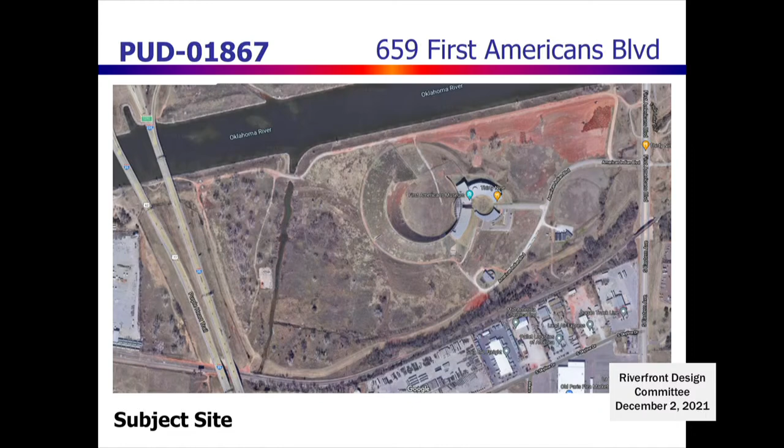So just quickly to go through our actual PowerPoint, as we always do, you can see here where the site is located, and we've kind of grayed out the First Americans PUD that was done separately. Another aerial view of the site, and kind of some surrounding views from the surrounding streets as you're approaching First Americans. And I will confess that we copied these slides over from a previous presentation about First Americans, so you're seeing the same things that you've seen several times before in these meetings.

So I'm going to pull up the applicant's presentation. If you all would like to approach, and if the committee has any additional questions for staff or for the applicant. Thank you, Katie. Are you going to be operating slide change? Yeah, if you don't mind, just because we have, okay. Yep, just let me know.

Thank you. Tim Johnson and Mark Zitzow here. We are with Johnson & Associates, 1 East Sheridan, Suite 200, Oklahoma City, and we are here on behalf of the applicant for this project. Just a couple of introduction remarks that I'd like to make, and then Mark's going to go through the heart of the presentation. First of all, I'm going to apologize for the length of this presentation because there's a lot of material we want to provide, and we think it's very important because we've been working on this for 2 years.

It only went public back in summer, July, and actually before it went public, we had conversations with City Council and the Mayor's Office and the City Manager advising the city that this was coming forward. And I was present in all those meetings.

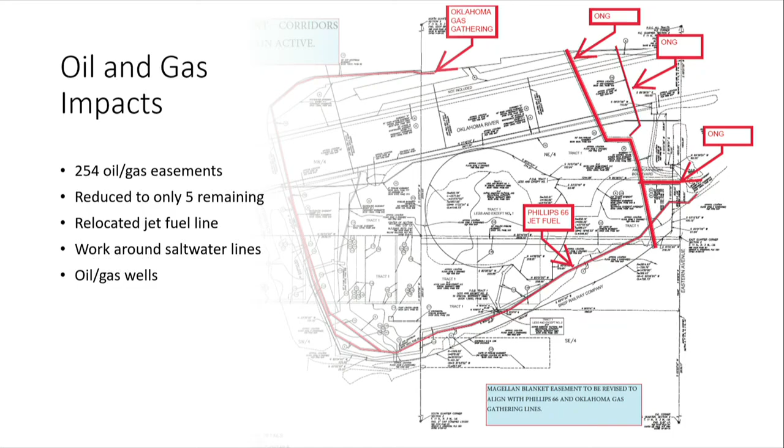We've exposed and excavated. ONG has been a great partner in this project because we are not only butting up against their easement, we're bridging their easement twice. And they have approved all of that. Next slide.

So on the site, you can see that the shaded, the grayed area is the existing museum facility. It's served by a lift station, the little square box on the bottom, it says not included in the PUD. That's the housing for the lift station that serves them only, and it was only designed for the museum.

The east half of this site and most of the west half of this site is in the 100-year floodplain. So we'll be bringing in a ton of dirt to raise this site well above the 100-year, in some areas 10 feet above the 100-year. And a lot of that has to do with the fact that the museum itself is on a pedestal, it's 12 feet above the 100-year, and so we'll be relocating the existing drive that serves it today.

We'll be bringing a new street, Mark will show this in a little more detail, around to the south, and then feeding the FAM, or the museum, through a separate public street. We've met with Embark about public transit, which was a very important aspect of Councilwoman Nice's concern about this. Her concern was getting workforce people to get to the site. At the end of the day, there'll be 400 workforce employees serving this.

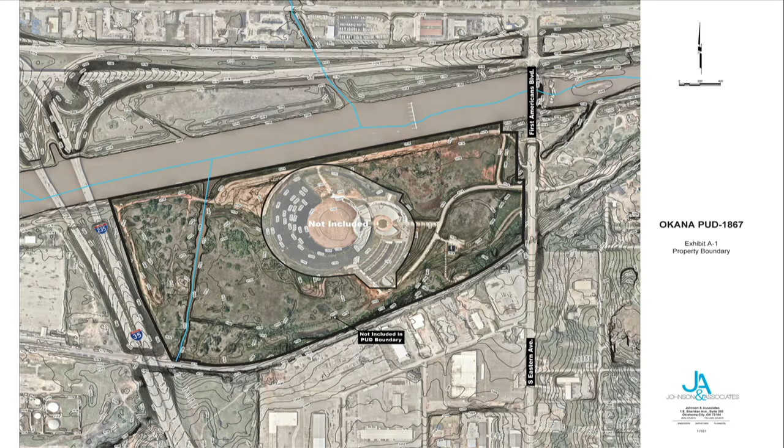Next slide. And then I wanted to point out that the First American Museum, as well as the leadership of the Chickasaws that we have been working with and the development team, they've been in communication. They're not going to be left behind. They've been involved every step of this process. And then next slide. So with this, I'm going to let Mark go into the design of the PUD.

Good afternoon. My name is Mark Zitzow with Johnson & Associates, 1 East Sheridan Avenue. Two quick points that were on our previous slide. We've also been working in partnership with the Parks Department and the MAPS Department in regard to the trail that will be placed along the river and new bike lanes that will go over the bridge and where that trail will cross over. So I think to Tim's point, we have been working with all departments, including planning and development services, on this PUD for an extensive period of time.

And as Tim was alluding to, this was not a way or an intent to cut the city out. This has mostly to do with the timing of the process of Scenic River. And so I'm going to walk through the project and then we'll touch base on that again. So Tim mentioned this site has been under design for the last 2 years, and we've been involved with most of that. The major focal point of this project is the First Americans Museum.

So this has been purposefully designed in conjunction with that museum to enhance it and note its prominence on the site. There's been respect paid to the equinox and summer solstice, which was part of the original master plan for the project. So there are pieces of that that have been carried through onto this plan. We are activating the riverfront with new trails, connections, and entry points from our buildings. I think you'll see this in the renderings.

We're not viewing any side of this building as a rear. There is no backside. Everything has treatment that's opening out to the river and internal. By its nature, it is somewhat of an insular property similar to the Boathouse District. It is essentially a resort that will be inward facing, but in no way does that mean that the river is not getting the treatment that's deserved for a project of this caliber.

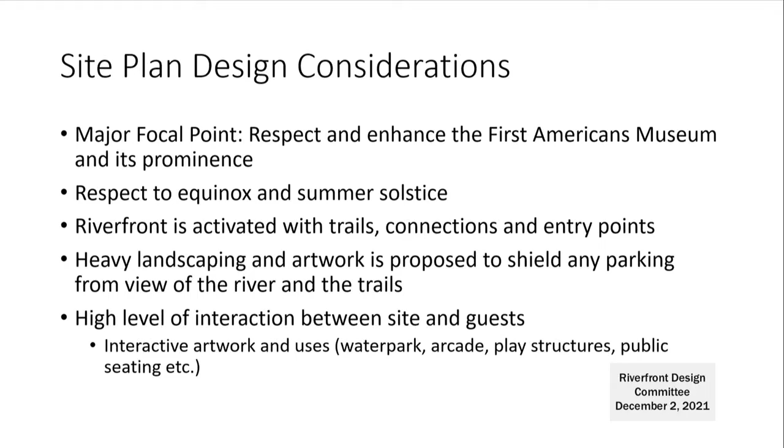And you'll see that through the heavy landscaping and artwork, both murals and interactive artwork that's going to be placed throughout the property. Ultimately, the goal here is a high level of interaction between the site, the river, and its guests. And again, we'll note that through some of the uses and the activation that's occurring on the site. Go to the next slide, please. Thank you. So I'll quickly walk through the site plan.

From a high-level standpoint, there are 2 pieces of this property that are not included in this PUD. Katie mentioned the First Americans Museum and its associated property in the middle. And then Tim mentioned the lift station on the south side that is not included in our PUD. So there's a small little piece in kind of the center south that is excluded.

You can go back. On the right, you'll see a color that's a little bit brighter than the rest. That is our phase 1 and our phase 2. That is everything you'll be seeing today. Within the PUD, there is a special requirement for what's called the future phase to come back for a specific site plan approval through the Planning Commission, given that that piece is a very highly conceptual design right now. Everything that we've been working on to this point is everything on the east side of the museum.

So I will start kind of clockwise. I don't have access to the mouse, do I?

No, sorry. So if you hover over the white building on the right, just south, yes, that's the water park. It's an indoor water park with slides that will exit the building and bring you back in. I'm going to kind of move clockwise. There is what will be a surface parking lot that's likely a temporary use that will be redeveloped down the road. There's the new street that is coming in off of Eastern that is going to loop around what's the backside of the development, bringing you

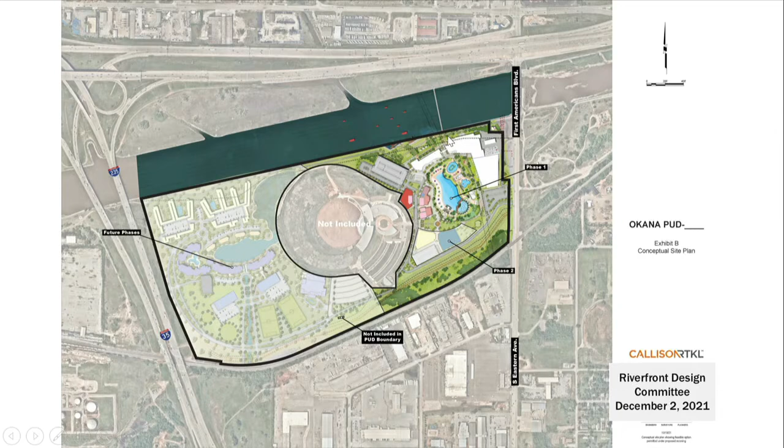You can see the trail along the north side of our property. We have worked with MAPS specifically to ask that that trail be put on a slight hold and worked and incorporated into the design. A grant was received to add a Devon River Cruise drop-off. You can see that cutout on the river. So a grant's been received for that. And in working with MAPS, the trail will kind of be a switchback for a grade difference to work back into the trail. That trail will head east, back toward First Americans Boulevard, and the connection through First Americans Boulevard is being moved to a safer location to the north slightly for access.

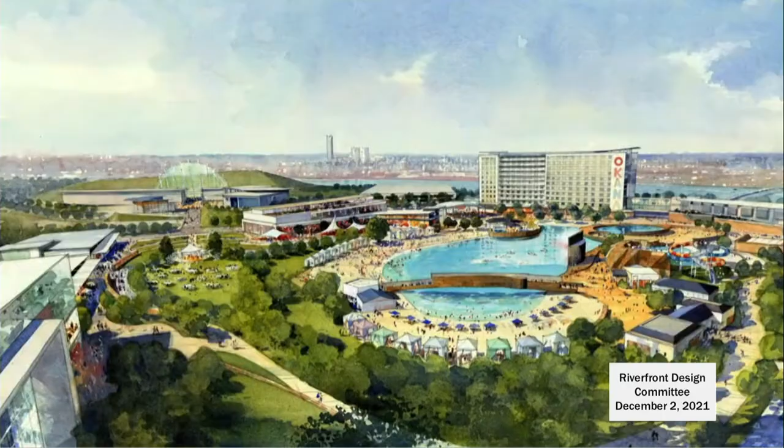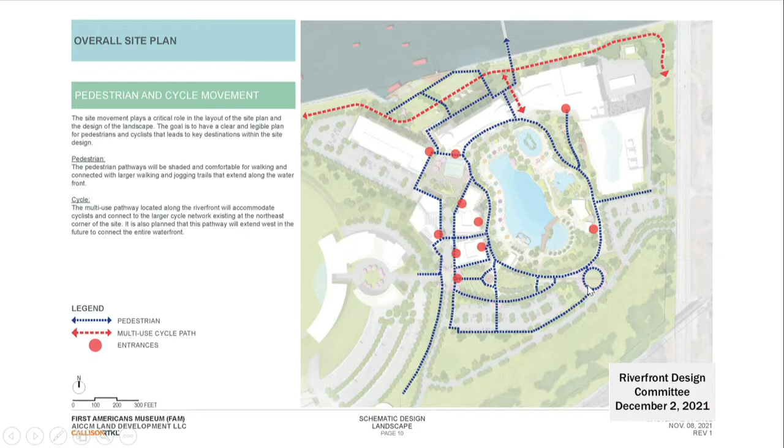Next slide. Thank you. So this is a rendering looking back toward downtown. You can see the First Americans Museum on the left side, and on the right side, the OKANA Hotel. This is essentially looking from the water park, and so you could see the lagoon feature. It's a beach-style entry pool. And then on the left would be kind of those Phase 2 buildings. There's a plaza / amphitheater on the left-hand side that's leading you into the museum.

And you can see the goal, and this is a rendering, but we're confident in what we're showing because of how far along we are in plans. There's a significant amount of landscaping that's going to be placed on this project. If you can go to the next slide.

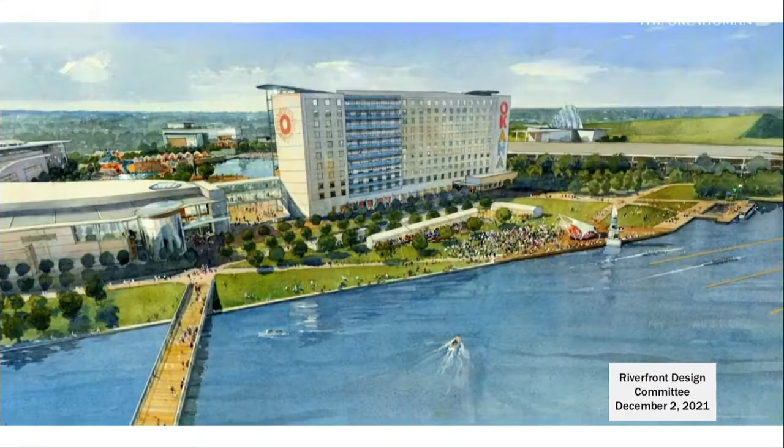This is looking south from the river. You can see the Devon River Cruise drop-off on the right side, and then there's another plaza by what's the starting line tower for the boat races and kayaks and canoes. So there's a large open green space, connections back to the trail, and you can see, just in looking at these renderings, that the OKANA Hotel is going to have openings and access points, and then those large pedestrian connections.

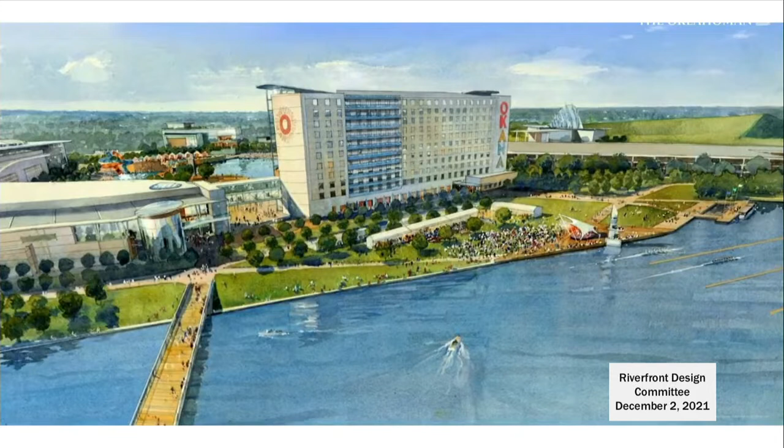The one piece I will note on this, the bridge that is shown is a funded bridge for the city. The location is yet to be determined. So because it's crossing the river and extending outside of the PUD, that will likely come back to you. It's undetermined as to what part of the river that bridge will actually be on, so you will see that bridge in the future.

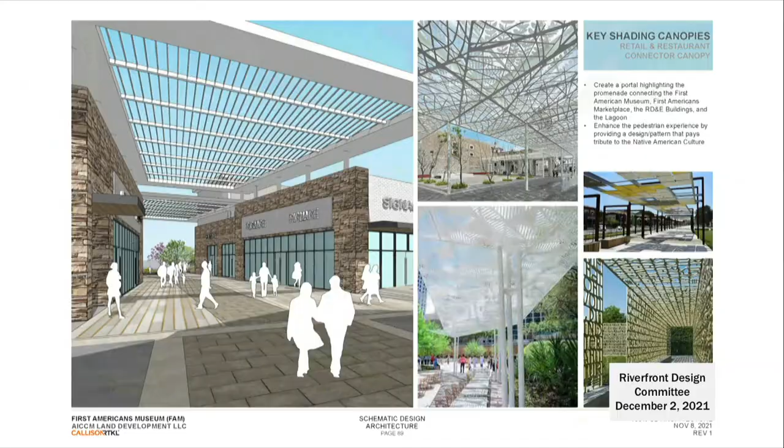Next slide. So in your packet, you had some 35 images and renderings. That's probably maybe an eighth of the amount of renderings and elevations that are out there. So I've just grabbed a few that I want to run through that show kind of the high-level design and architectural materials that are being used. Oklahoma is hot. I don't think that surprises anybody. So a portion of this project is being designed with more interesting and artistic canopies to shade some of these walkways and these plaza areas. If you can go to the next slide.

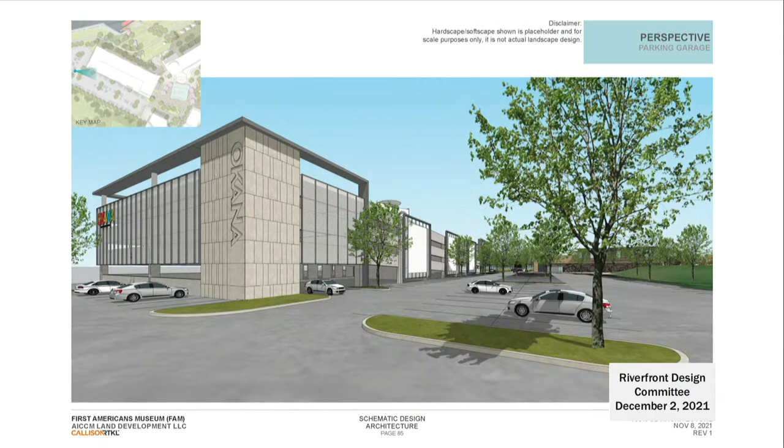Here's a picture of the parking garage. So this is the side of the parking garage with the surface parking lot that is facing away from the river. And you can see on this one there are berms on the right side that screen it back to the museum. But if you look at the parking garage, there is going to be architectural screening, but then there are large blank canvases that are going to feature native artists. And this is just on the parking garage.

You'll find that on almost all of the buildings as we kind of move through this, but it will be heavily landscaped. And on the top left, you can kind of see the angle in which we're showing you. This would be on the side away from the river. On the side facing the river, there's much more landscaping to shield the parking garage further. You can go to the next slide.

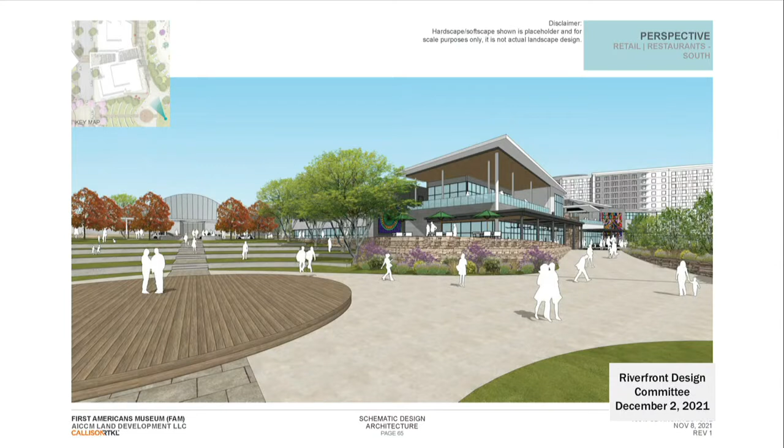Here's a plaza that's looking back toward the First Americans Museum. I think this shows that this project is still being built solely around that focal point and tying back in. And then you start to see the use of a lot of stone and earth materials that have been used and are represented in the First Americans Museum. Next slide.

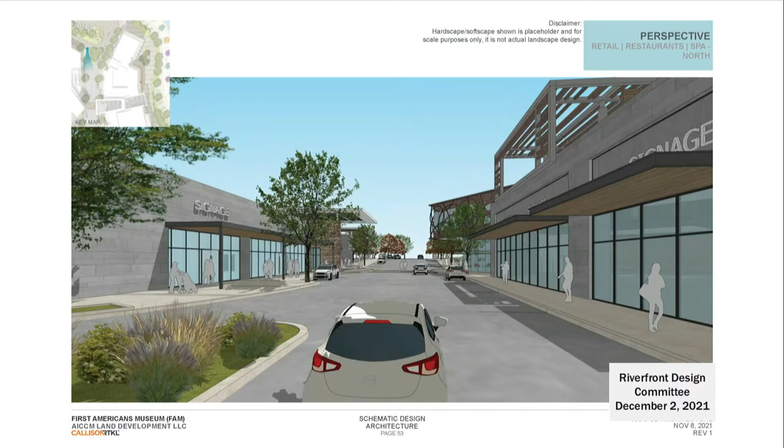Here's a section of the street that's being proposed. You could see the retail is fronting. The signage in this area is minimal. There are sidewalks and landscaping and tree wells that will be placed throughout the project. Next slide. Here's another view.

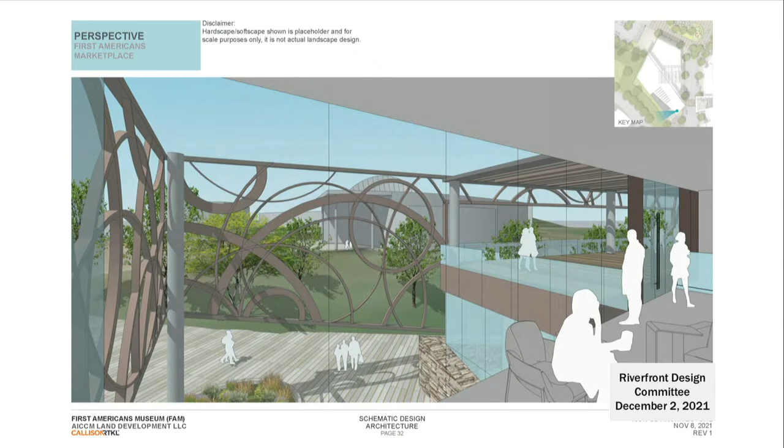We're looking at material changes within the street and in the plazas to note pedestrian areas versus the vehicular areas. And again, you can see that use of stone and natural materials throughout the project. And again, the awnings that are providing some shade to provide comfort through all seasons. Go to the next slide. This is a second-story view looking back at the museum. So again, all of the buildings are trying to provide a perspective looking back toward the museum. Next slide.

This would be the spa, golf simulator, and retail buildings. Again, there are large pieces of artwork that will be placed on the sides of these buildings, highlighting native artists.

I'll close with the images and renderings of the sign package represented in this PUD. As you can imagine, there's not a lot of high visibility from this site, so we think signage is important. We're proposing two project identification signs located at Eastern Avenue, similar to the variances you've approved for the museum.

But then there's a series of other signs located throughout the district. This project is unique in that this whole tract is being developed by one entity. The reason that's different is if you think about Bricktown or downtown, you're dealing with signs on a particular building, on a particular site, and how they're all interacting together. This is a project cohesively designing all of the signage, knowing what its needs are, which are higher and different from that of a design district.

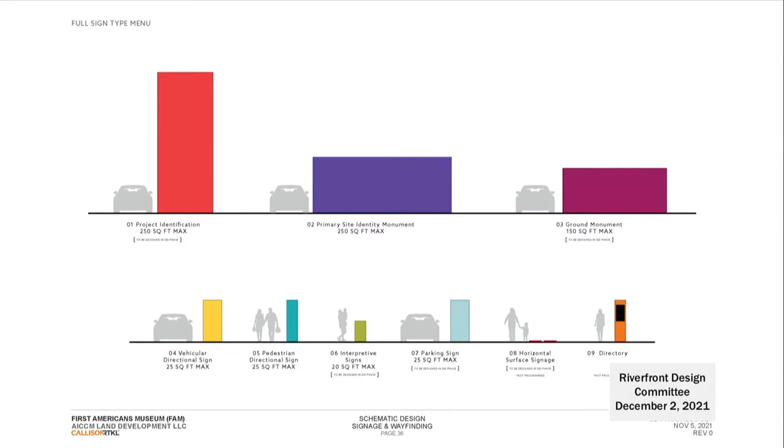So Tim mentioned Scenic River being adopted in 2007. The museum was on a bit of a break at that point. We're now at the point where we know exactly what's going to happen. The district in this area was established to help encourage this development to occur and provide its flexibility.

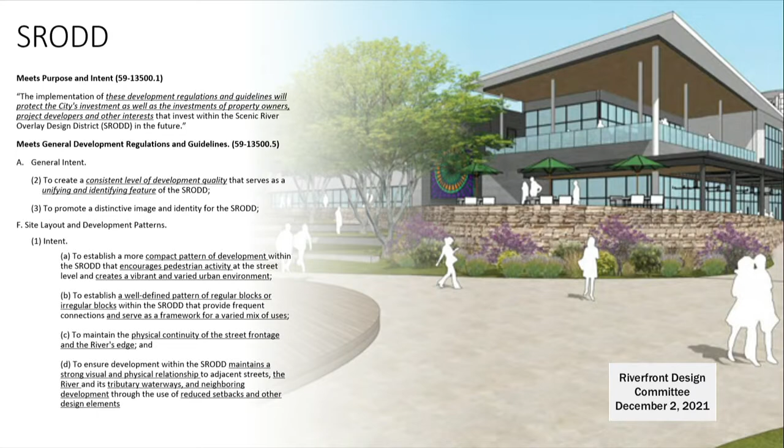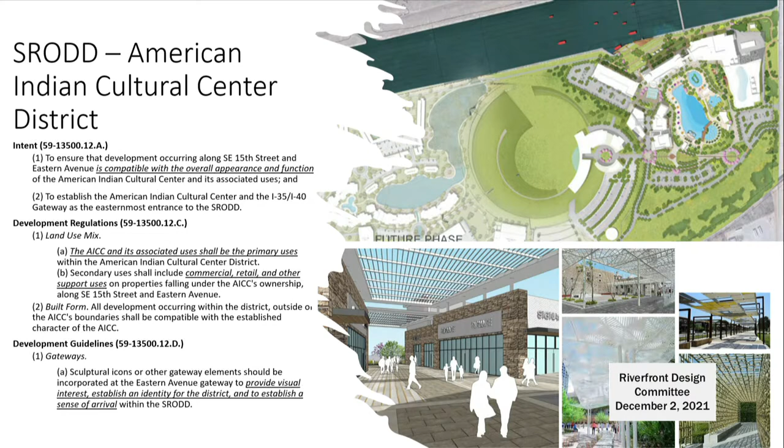We believe that's what our PUD has done. We're at the point where we know exactly what we're doing on this first phase, and our PUD is written in such a way that gives us the flexibility we believe we need to accomplish this project in the timeline provided. This sub-district of the SRODD outlines that it should be built around the museum and uses that support the museum, providing visual interest and establishing an identity for the district and a sense of arrival. It's hard to imagine a project doing that any better than how it's being proposed and designed.

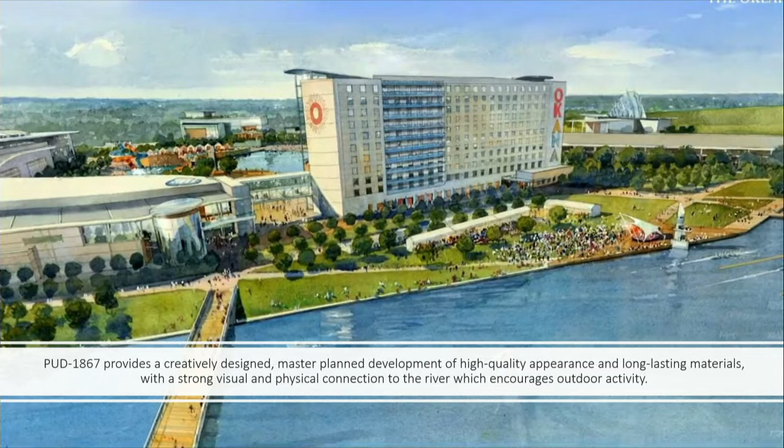So ultimately, the PUD, we believe, is creatively designed. It's a master plan development of high quality appearance and long-lasting materials, with a strong visual and physical connection to the river, which encourages outdoor activity. We believe that pretty well encapsulates the intent of the guidelines for this particular site.

While we're happy to continue working with staff on particular regulations that need to go into the PUD, we believe that this PUD meets the intent of this sub-district.

So a quick recap: the intent here is to create a world-class resort and activity space centered around the world-class First Americans Museum. We believe we've given the proper respect back to the museum and to the river with our proposed design. We believe this will create a new district and ultimately a major tourist destination for Oklahoma City. There's internal architectural oversight being provided to ensure compatibility with the First Americans Museum and our connections to the river, and we think this is setting a precedent for this area.

I think the goal here is we would begin to see some of the industrial uses start to transfer over to other ancillary uses, which all remain within the design district and not part of this project.

Ultimately, we're asking for your recommendation to Planning Commission for approval of the PUD as presented, which does ask to remove it from the Scenic River overlay. With that, we'd be happy to take any feedback and answer any questions.

Thank you very much. Can I add one thing? I apologize. So what came to mind on this, as Mark was presenting, is this isn't the first time we've done this. In the Bricktown area, if you'll recall, the Lower Bricktown came into vogue way after the North Bricktown Canal was built.